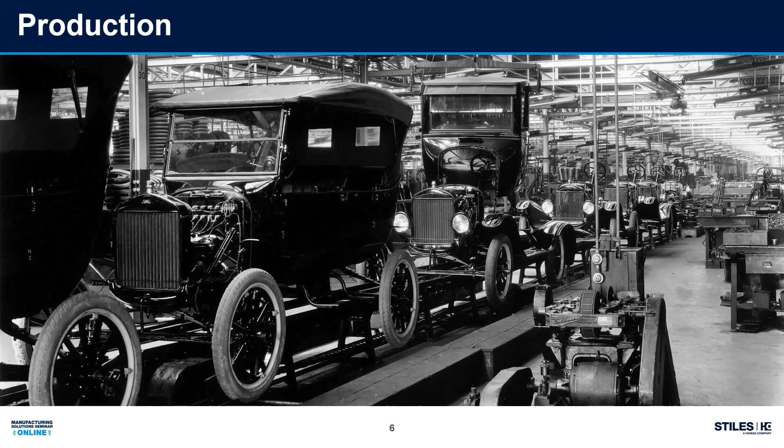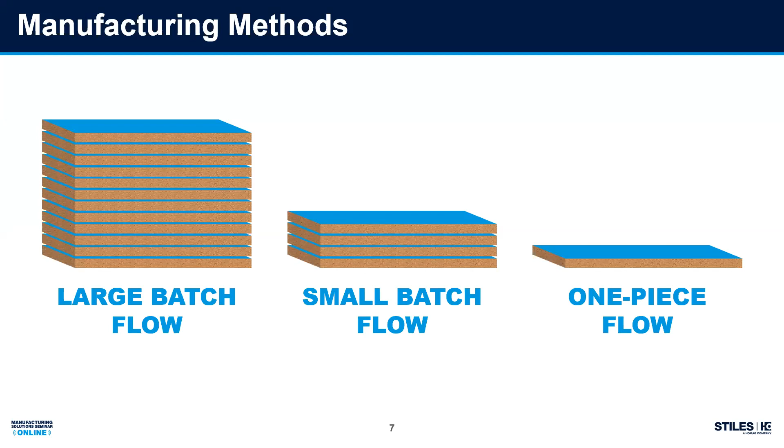We're going to focus today on batch flow. Some of the manufacturing methods that we see in today's world are large batch flow, small batch, and then the buzzword is one-piece flow as well. Where does that fit in today? We only have a limited period of time, which means we're going to take a lot of thoughts and information, and we're just going to be scratching the surface, but hopefully we can challenge you with some ideas.

Large batch flow - we sometimes think more is better, and I'm not one to challenge that, but the demands of our customers limit the amount of a lot of the same part opportunities that we used to have.

This style of production is defined as continuous production of items in a series of steps, where all steps are performed concurrently. What this means is I do all of a part in step 1, then move it to step 2, then move it to step 3.

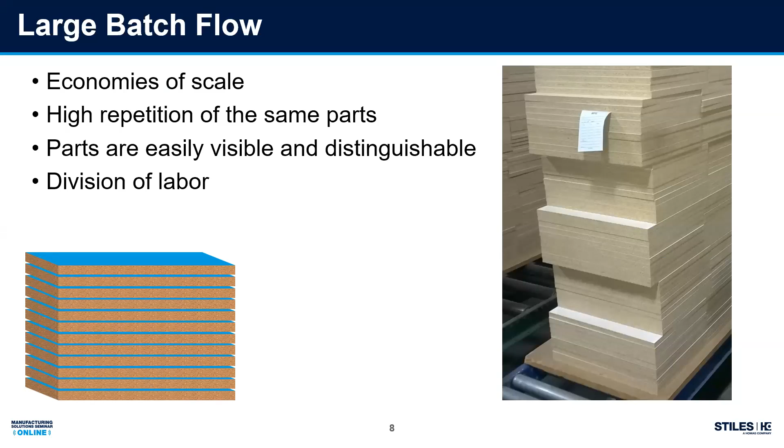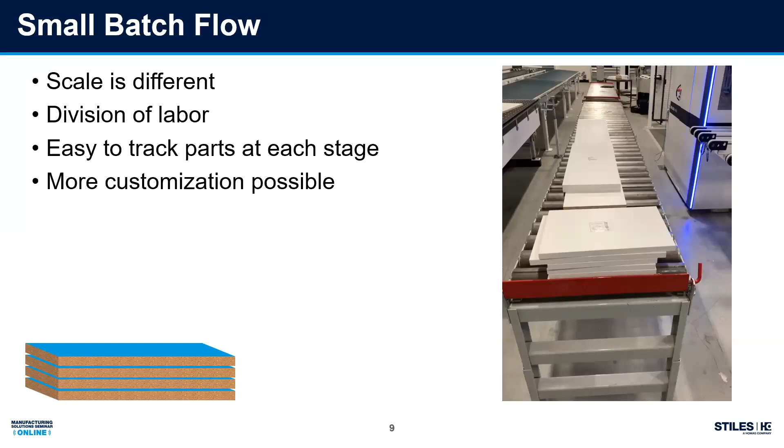Small batch is very similar, but the difference here is instead of a part moving from step to step, I'm moving all the parts for the batch through from step to step. Now this allows for a little bit more customization. It's easy to track the parts. You still have a great division of labor, but the scale is definitely different.

And then one-piece flow is a method of production that moves a product along the stages of manufacturing production, and it moves along those stages once that piece is complete. In other words: I touch it, I move it.

Now, when you think about the mass production in that Henry Ford assembly line, keep that picture in the back of your mind. What Henry Ford had was a great feeder system to that assembly line. We're going to take a look at how that feeder system works in today's production and how we work with it, and let's take a look at how it relates to panel processing in our factories today.

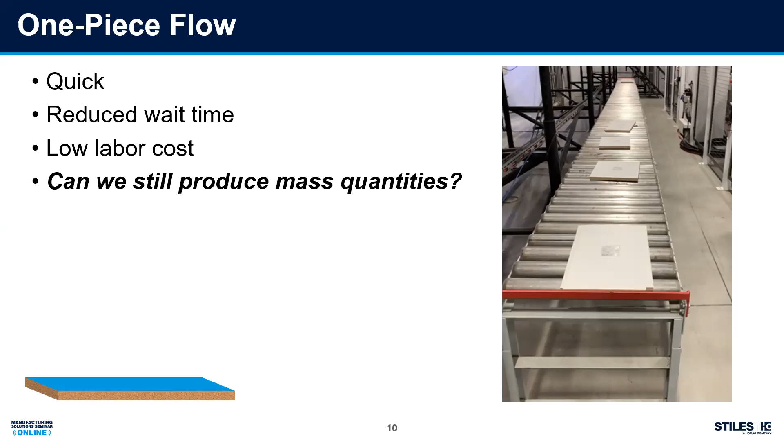So I talked about Alec - well, I'm going to reintroduce him today. Alec is the owner of my shop, and we'll be using him as an example. He has a lot of questions.

So what is the difference between small batch flow and one-piece flow? Should I implement a one-piece flow in my solution? Is there a hybrid solution? What is the best for me? What about my business? When do I make money?

Boy, Alec, those are all great questions. Hopefully by the time we're done with this presentation, we can answer a lot of those for you.

But I'm focusing on small batch flow here. Why would I do that? Doesn't this illustrate that one-piece flow is better? Well, the answer to me is really pretty easy.

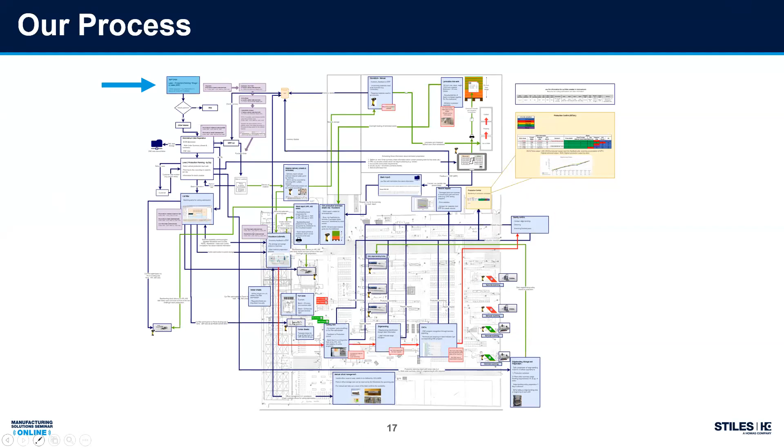But let's get back to the simple aspect. We have customer design and customer order. Now, remember Alec — he's going to help us understand a more modern method of getting an order. Let me get him; I've got to turn off my laser and make sure I don't lose my presentation. Thanks, Scott. All right, go ahead, Alec.

Perfect, good to go.

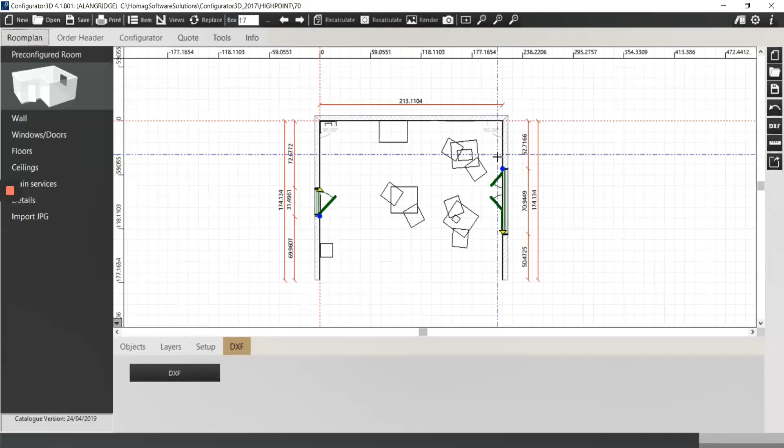Scott started this presentation talking about customization. In today's world, our society is dominated by custom this, custom that, and ordering everything online — from customizing a car, one of my favorites, to designing a pair of shoes. Customers definitely don't order the way they used to in the past. So why not bring that to our industry? Why not have a solution that can configure what we make or sell, from couches to cabinets or even concert stages?

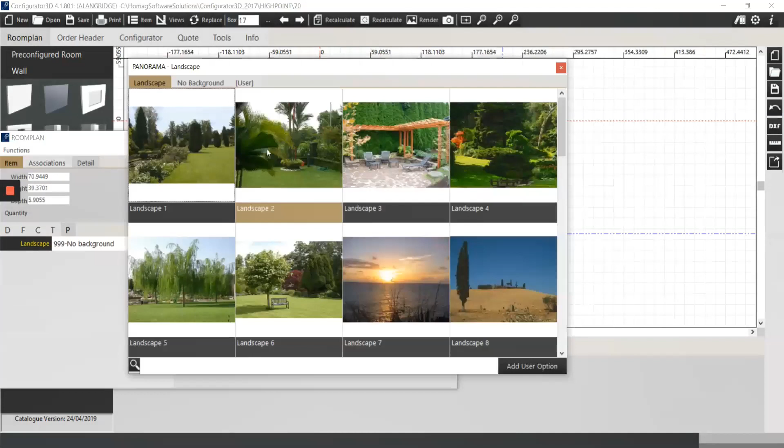What you've been seeing here is the start of creating a typical job inside the Configurator 3D product platform. The Configurator 3D is built off a graphic engine, so if you haven't already noticed, it's much different than most systems used in our industry.

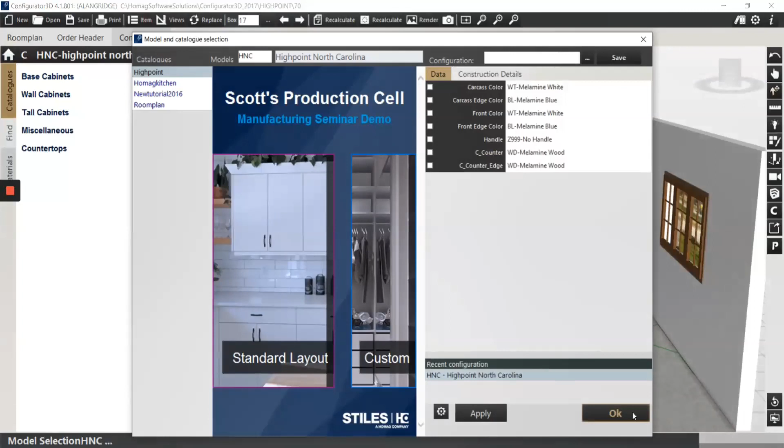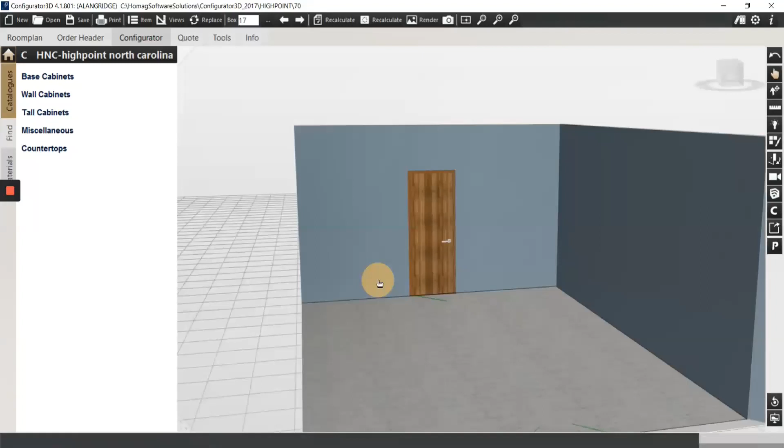Using a configure-to-order solution such as Configurator 3D, you can create rooms by placing pre-existing products or designing with parametrics, essentially making items fit your space. It also lets you modify color selections and quick variations like hardware or door selections. The flexibility and customizability of Configurator 3D allows you to create a design specific to your end user while virtually walking through the job as if it were a mock-up or store display. Here's what the configurator can do.

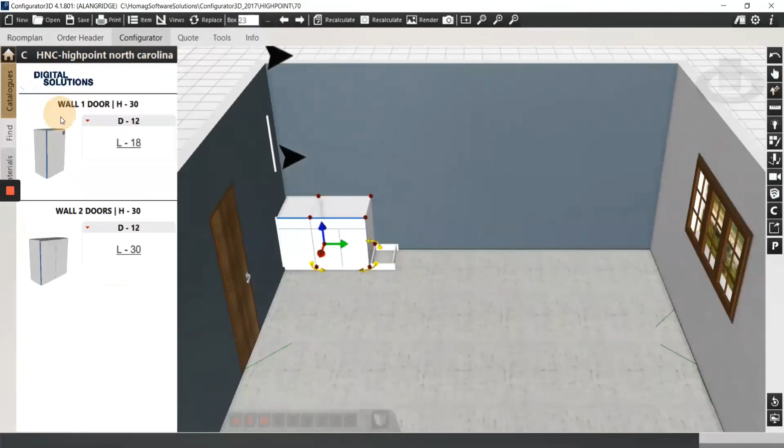Realistic and accurate 3D renderings differentiate you from your competition, helping your close rates increase substantially. A recent study showed 40% higher conversion for close rates and 30% improvement in average sales prices when using 3D models instead of 2D static images.

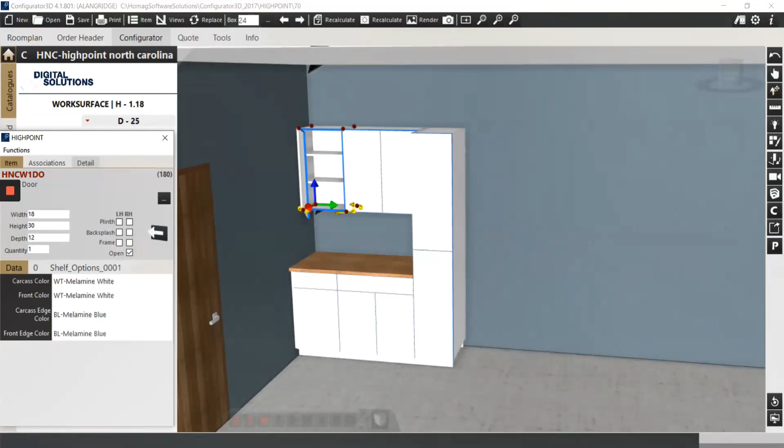We were just showing some of the tools available today to you, but whether you have VR goggles and want fully immersed virtual reality, mixed reality with an actual picture of your design environment, a shareable 3D design link, or anything in between, we can help you.

These tools help you get more business quicker while giving your customer the opportunity to almost touch and smell their dream designs. Now it gives you time to spend more time on what you enjoy most.

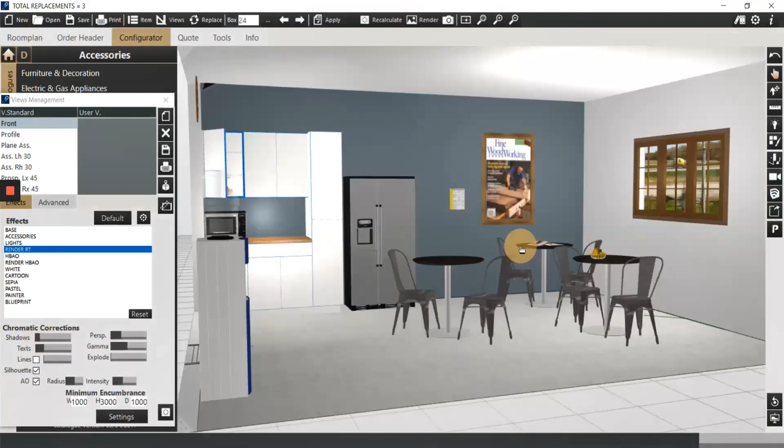Accurate renderings also mean perfect order performance. With the Configurator 3D, you are delivering complete, accurate information about the order, not only for the factory floor, but for the end customer as well. More about that in a few moments.

We pointed out that many people are shopping online today, and with the stay-at-home order due to the coronavirus, a 3D web-based system is even more essential, honestly. This seamless product platform for online web design and sales tools is a solution.

This same platform has solutions for franchise, dealer, or design networks to connect right to that designer. Configurator 3D is a scalable solution to drive your business of today while preparing for your business of the future.

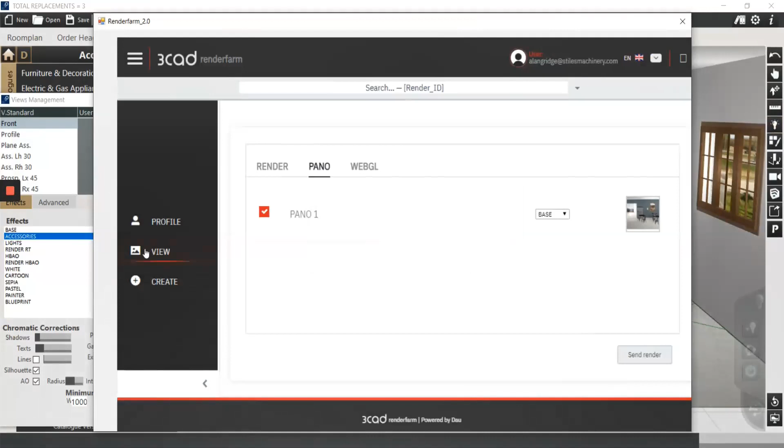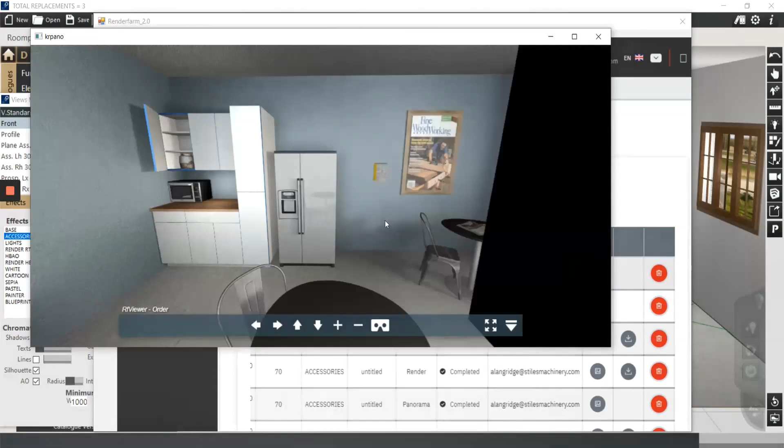Now, while we continue to show the graphical design features and processes, we'll now get into the manufacturing data. In the background, we have a full back-end solution with all the machining and necessary information for your factory floor. This gives you opportunity for custom printouts for both external and internal use, as well as live price lists and quotations as designs change.

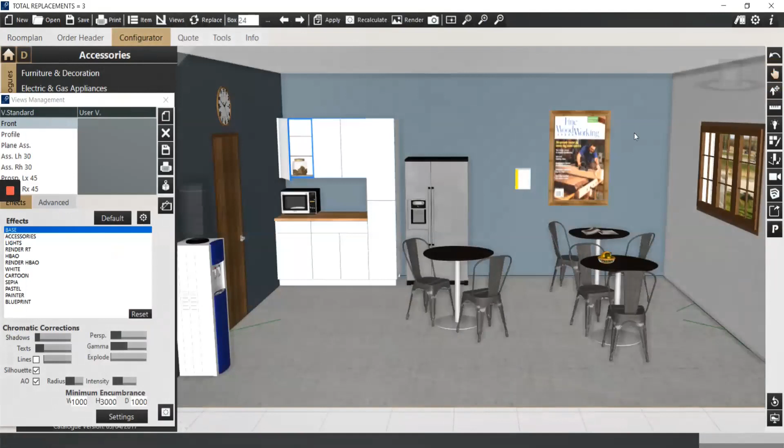You can easily look through the pricing structure and bill of materials, as well as remake part information on the shop floor, being that it's one of the harder things to do in today's shops. The configurator makes this easy for those times that your edge bander guy accidentally drops a panel and it gets damaged. Now, Scott, are we making any money yet?

Well, Alec, thank you. I think we're getting close, but what about the machining information? Is it brand specific? No, and I love that question. So the Configurator 3D is completely an agnostic solution.

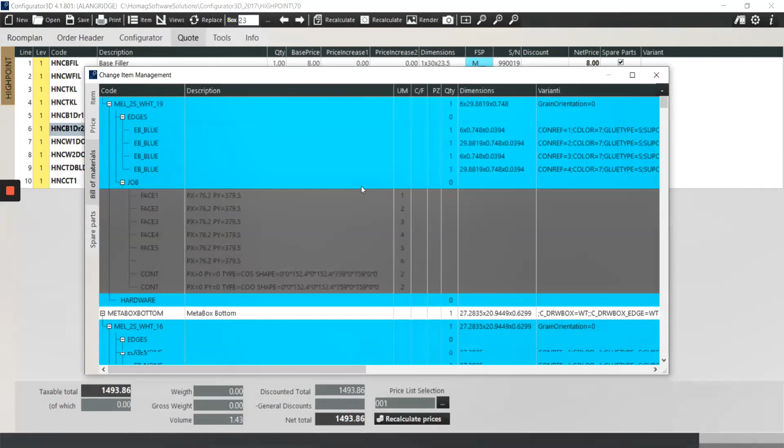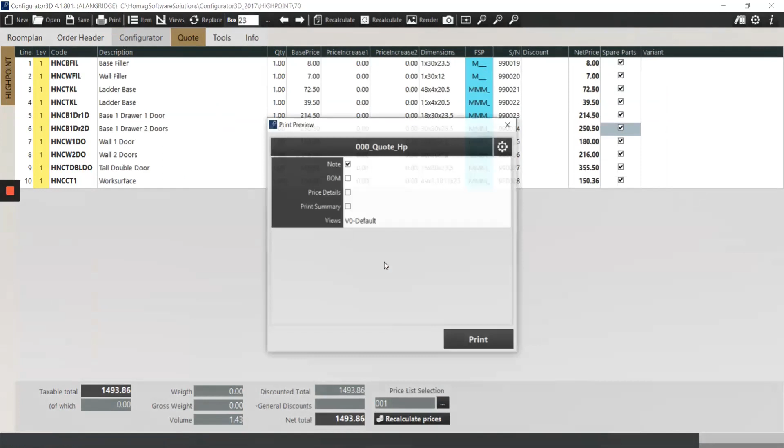So we can connect to any machine as long as it has data feedback on it. What about additional softwares like ERP and CRMs and MES systems, working with those? So being a flexible product-oriented software, we welcome those connections to other software. We want to ensure a total solution for you as the end customer.

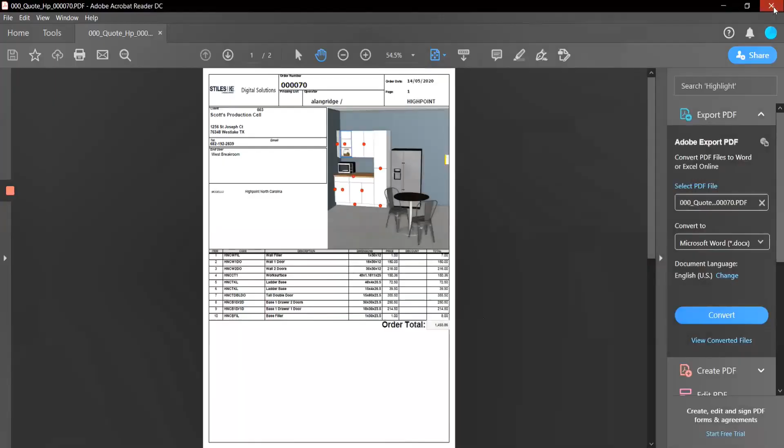So Alec, I've got this 3D visual, this 3D graphic. What do I do with it? So I'm actually going to send a 3D link that anybody here can click into, and you're going to feel yourself being immersed into this situation.

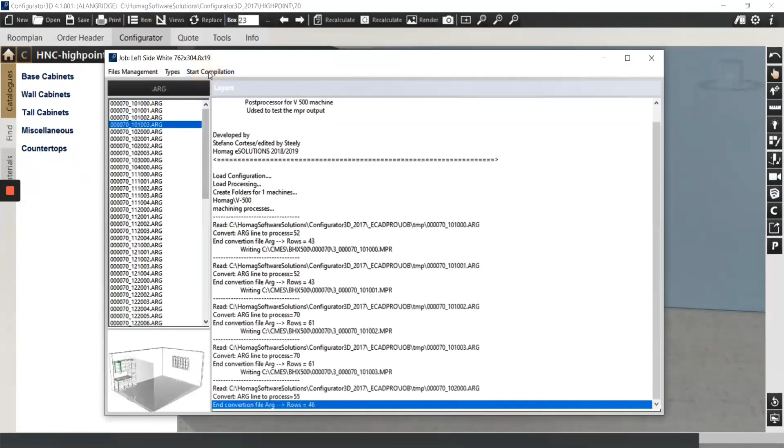Now, from what Scott said, he's asking me why. Well, honestly, I've had enough of people saying, this is not what I ordered, I did a different color, a different layout, and this is something I can give them and say, hey, this is exactly what you're getting.

And I usually give this right with the confirmation order, saying, yes, this is the product I want, this is the kitchen or the area that I want, and we're good to go, we're all on the same page. Alec, I really appreciate it. That's again a much more modern method of getting the information from the customer design to the customer order and making sure we get all that together. Alec, again, thank you for that.

Absolutely. So as I mentioned, we've simplified the process. Now we have to go from that customer order to our data and materials and into our production, our supply chain. And the supply chain is what our factory is, and we'll talk more about that.

So remember, we're going to take this elevation, and we're now going to have to create this elevation into our system. What do we need for that, and how do we get all that information in? So we now are working with our ControllerMES.

So our Configurator 3D product has sent data, the pictures, the parts, and all that information to the MES. Controller MES then is going to take that data, double check and make sure we have all the data we need.

It's going to look at the parts and make sure all the edge banding information is there. It's going to give us the barcodes that we need to produce. It's going to make sure the edge bander data generation for the automated edge bander is available, and make sure all the CNC machines have the right data at the time we need it.

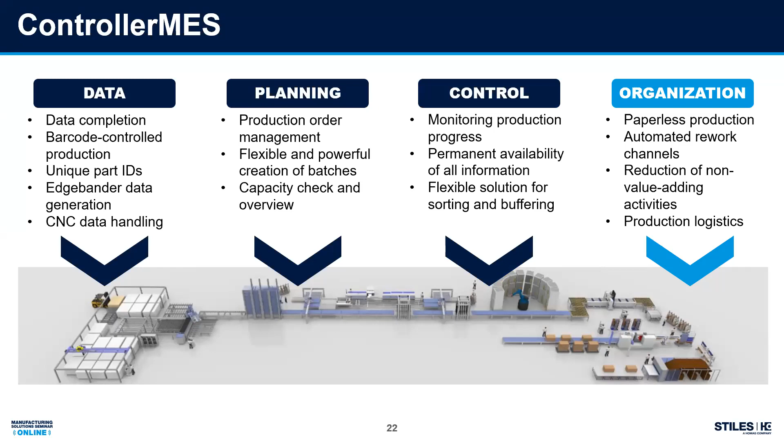Man, it does a lot for me. Now, you guys do that on a daily basis. Do you have an MES system? No, but an MES system can handle this faster, easier, better.

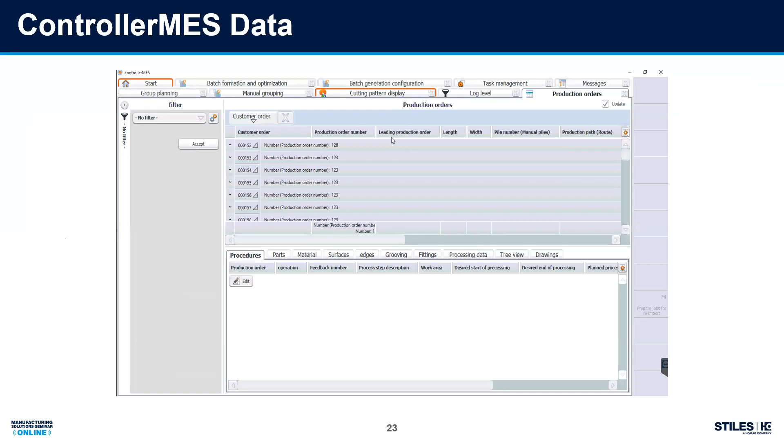This screen is just an example of some of the batches that we get in the MES. So the configurator's created a job, we've created a batch now, and I can take that batch and drop it into a day, and it'll automatically create a production day based upon the delivery schedule, or I can drop my batches in based upon any other type of criteria. In this case, it was delivery days.

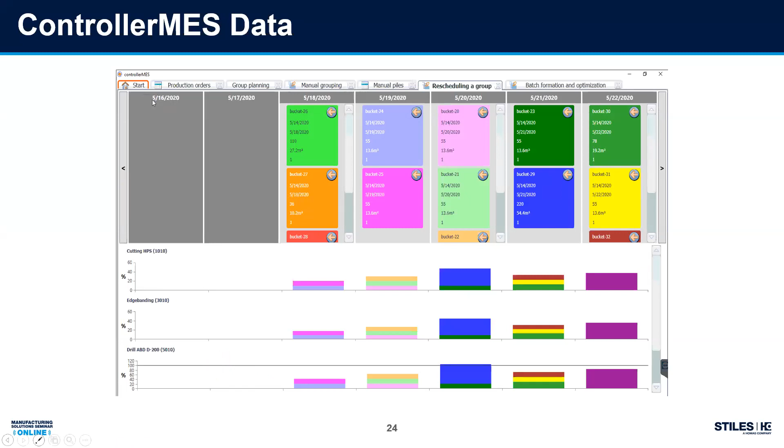Now, how do I understand what a machine can do on a daily basis? Is there automatic feedback? Is it taking artificial intelligence? Is it doing a lot of other stuff?

What we've actually used is our machine monitoring reporting system in the background. Each machine produces a lot of data, and each factory uses equipment in different ways. This is not to say they're using a drill as a router, but that the operator, mix of parts, tooling that you use, and handling in each company puts a different load and therefore output on a machine.

As you heard from Tamika, in my previous life I was a saw expert. And I could tell you within seconds how long it would take to cut a sheet or stack of sheets. I could project the output on a daily basis. But you never believe it. Often my projections were not realistic.

All of those other items, the handling, the operators and things like that, which we have little control over, dictated the output. And many times I would be able to go back and work with my customers to help improve the output. But now with MMR, you have the data where you can see these things for yourself. You can understand on a historical basis what is a realistic number of parts you can achieve and set those limits now in your MES system so you can plan realistically what your factory will do.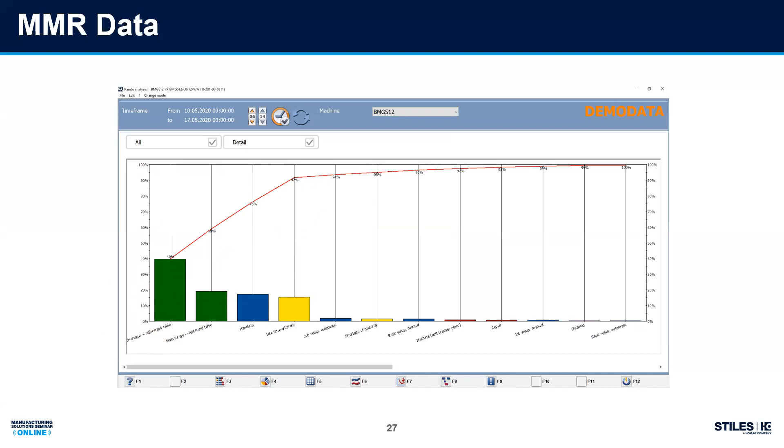Now we've got our data from the office, and with that data, we know how much material we need and things like that. So now we need to get to production. And this is the point where it's usually a lot more fun making this presentation, because you can see all these cool machines in operation, and you can see the part flow and see the operations actually happening.

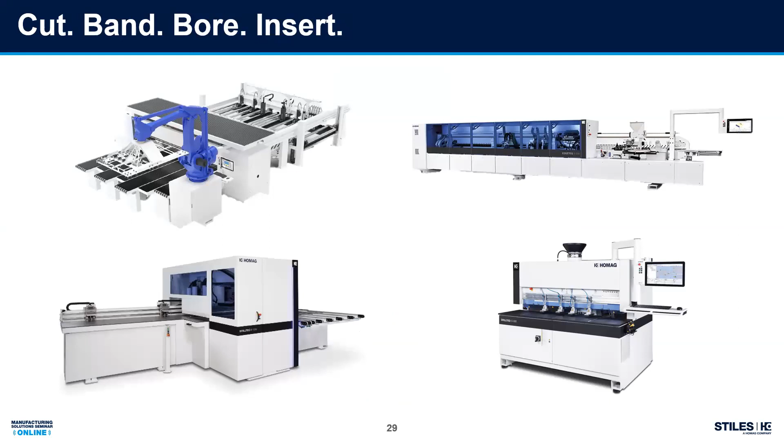I have to do it on a screen. So our operations are cut, band, and bore.

Well, the first thing we did, when we looked at the layout and the type of machinery we're going to balance in there, is we used the Goal book. It's been around for about 25 years, and its main focus is on the theory of constraints. And the theory of constraints basically states that you have to work to your bottleneck. So we were able to use those theories to figure out the balance and the load between each machine.

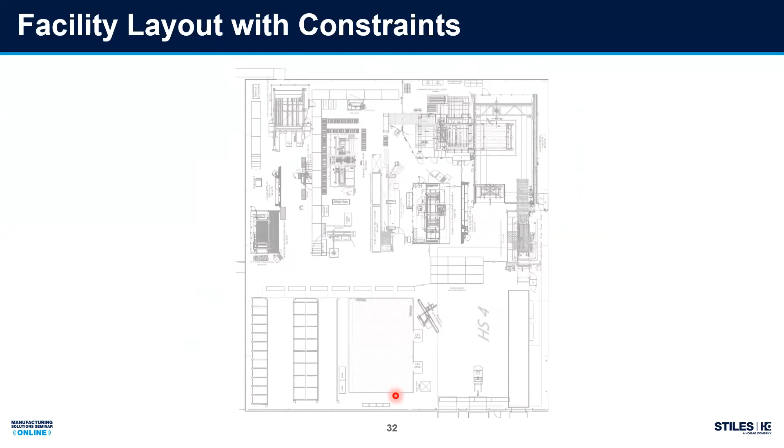Now, this is the space in our showroom, where our factory is laid out. You can see, if I remember right, it's about 30,000 or more square feet. But I have problems there. I've got a lot of it taken up by storage and classrooms. I've got shipping and receiving. I've got walls in place. I've got columns I have to work around, and I have material flow areas that I can't block off to be able to get through.

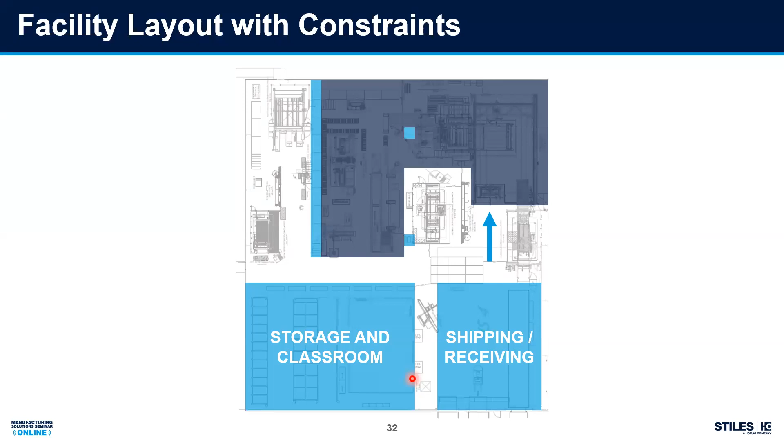So these are some of the ideas of facilities dictated by shape, space, and machine design. That's some of the ideas of how we got to the layout that we're at to be able to work with it. And that's actually what we're going to be looking at, is that space right there.

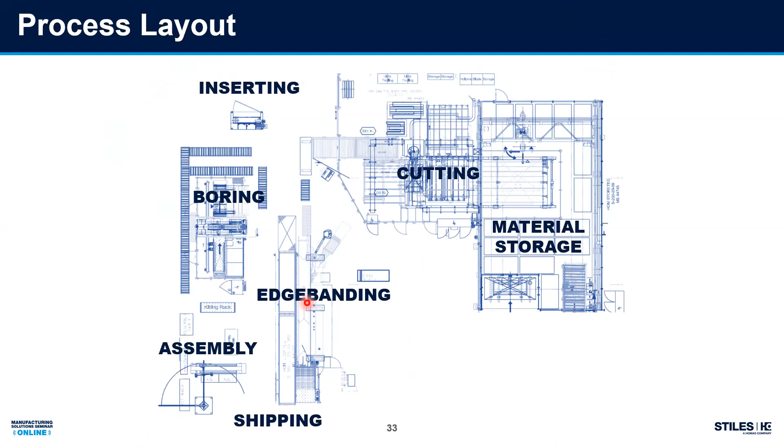In that space, we've got our material storage, our cutting, edge banding, boring, inserting, assembly, shipping, and this area here could be utilized for product storage and things like that. And if I look from one side to the other and from here to here, it's roughly 80 by 100 in space. So when you think about the amount of space that we have, it's roughly 10,000, less than 10,000 square feet to be able to produce what this system is planned for. And this system is planned for about 160 cabinets or cases a day based upon the designs that we looked at.

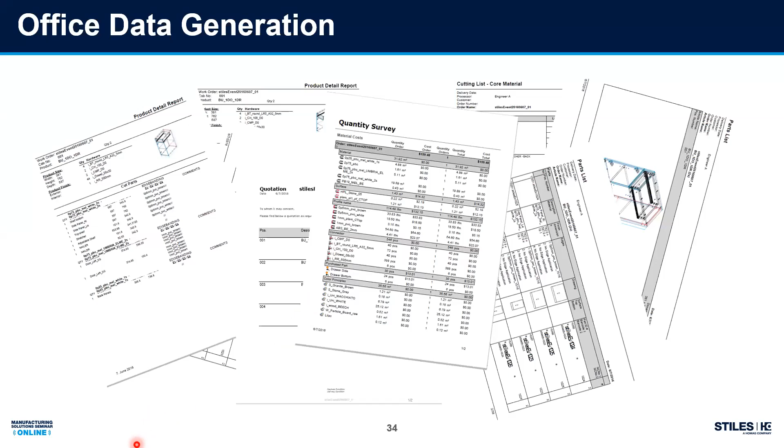Now, how many of you, when you start to introduce a job into the factory floor, have to produce a bunch of reports, paperwork, bill of materials, optimization patterns for the saw operator or for the nested-based machine operator, things like that, before you can even send the job down to the floor?

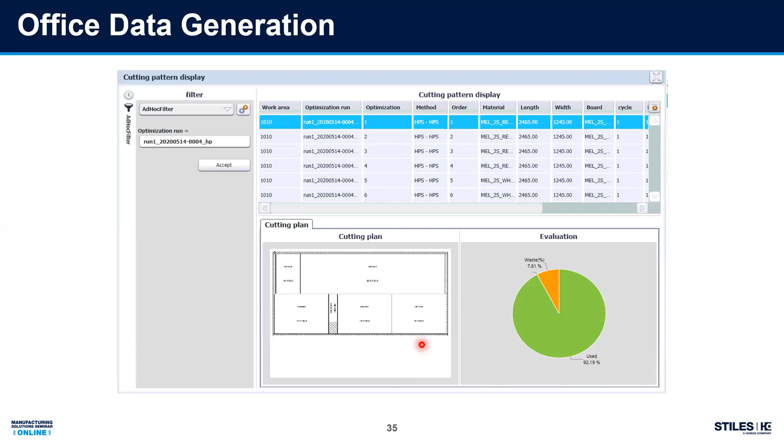Let's go to production. So by working with our Cut Rite system and the MES balancing that, it's automated that. Now, if it didn't meet a certain limit of our yield, it could kick it back to me, and I could then affect my batches by maybe combining two jobs together, mixing a couple of different parts into it, things like that, to help drive my yield to get to the yield that I need.

And now you can see the storage system, a robot, 3-axis robot, is going back, and it's feeding and bringing in material. And guess what it's doing? It's feeding another robot. And if you look carefully on the screen, you can see that the next sheet of material that is getting ready to set down right now is a completely different sheet.

It's a different color of material. Our constraint of changeovers, batch size and things like that is no longer the limiting factor. Many companies make decisions on material handling for batch sizes, for how much they want to produce, and for changeovers. In our system, we don't have any limits that way.

Now, what are some of the ROIs for using a storage system like this, the SawTeQ? You minimize the damage of material. One customer told me 300% less handling of the material. It also gives effective methods of offload and inventory control. You know what it is, where it's at, when it was brought in, and how to handle it.

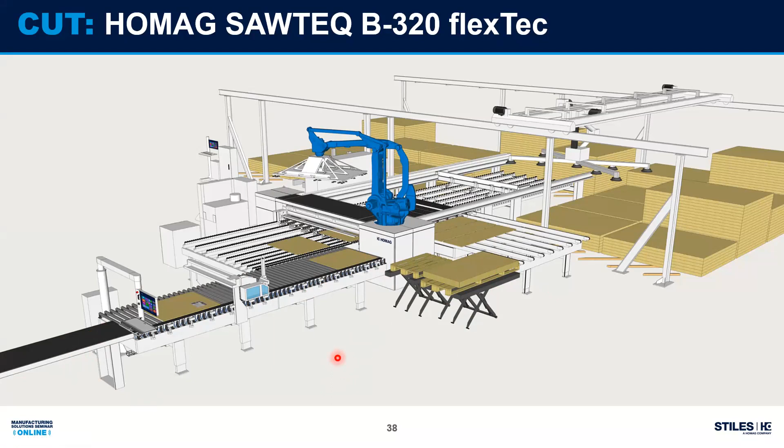What's really interesting about this is it allows me to run the system before my shift, during lunches, at break times, without anybody at the machine. It automatically stacks to those lift positions, creating a chaotic stack, setting some parts aside, laying them down and interweaving them. So I now have a stack I can move to another area without worrying about them falling over. Many robotic systems only stack with center-to-center justification.

So if I was doing different size parts such as this pallet, there's no way I could move it afterward. We also talked about label printing. The letters here represent the path these parts are going to take. You can see I now have all the information I need on it, and this barcode ties this label, this part information, this piece, to all the other data that we have. That's a critical part.

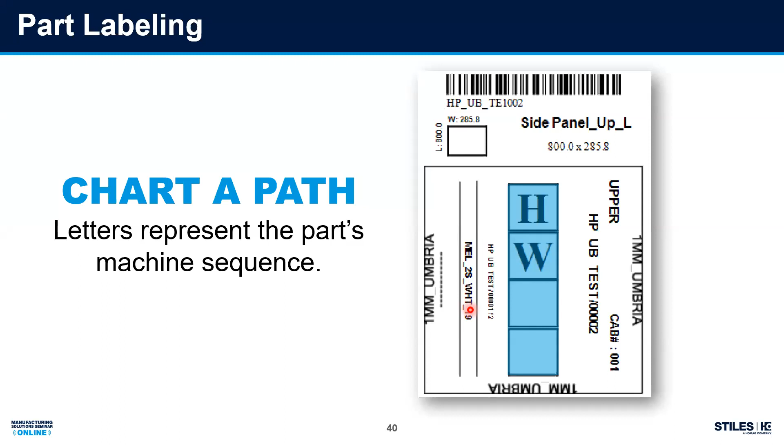Not only that, by automatically applying the labels, we get the exact orientation. So I know the grain direction. Even if it was a cross-grained part, it's not going to be put on the next machines incorrectly.

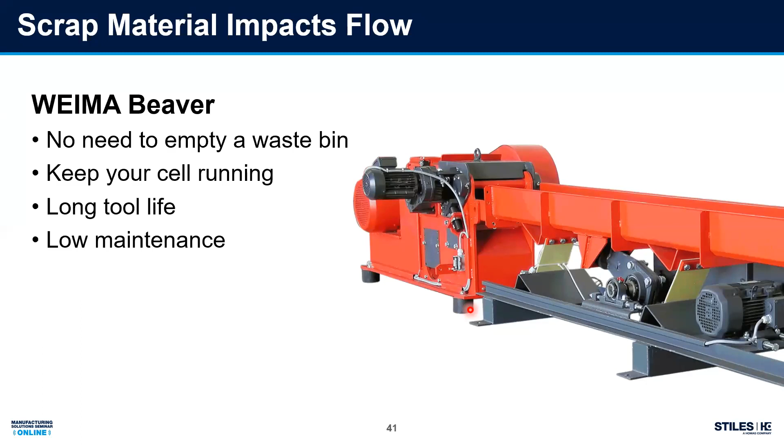Now, what you can't see in this is waste removal. That saw is cutting pieces, dropping things down. Instead of having to stop that machine occasionally, or stop any of the other machines, I have a grinder which automatically empties that saw, grinds the pieces up, and puts it in my dust collector. Some of these options we talk about aren't inexpensive, but the payback from reduced handling and keeping the parts running through makes it well worth the cost and the application.

Now, this is the view outside the front of the machines. We're taking a batch, and now we're breaking it down. Remember, we talked about the sheet sizes and having a batch to get started with? You can see we've transitioned from a yellow sheet to a white sheet.

You'll notice in front of the edge bander, there's not a big stack of material there, right? As the part is finished, you can see Gil, one of our operators, taking the part away. As that part is finished, remember that one-piece flow, it's moved along, handled once, and it moves through the system.

Now, this also requires flexibility, remember we talked about that. John Ridgway, in an earlier presentation today, showed a video of an edge bander running, and again it was exciting - it was like watching paint dry because you don't see what's happening. Same thing with this edge bander, right? It's doing multiple changeovers.

It is doing unique contour trim routes, trims on the side. It's doing straight trims sometimes, and it's doing all that stuff without anybody opening a hood or any other changes.

As you can see back here, this is 6 different coils of tape. I've seen blue through this system already, I've got white, I've got yellow in there, and nothing's been changing. The screen gives visualization so we know the right orientation of the part. You can see I've got yellow in there now and white in the edge bander right now at the same time, showing the flexibility of the system and the changeover.

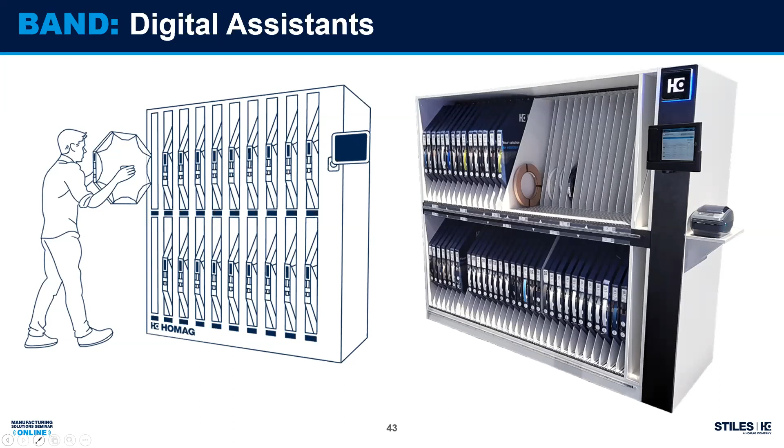And I mentioned that light stack, or the scanner stack above the edge bander. It could be run with a hand scanner like this, but just imagine trying to feed parts into an edge bander and picking up that hand scanner every time. Again, an automatic scanner is not inexpensive, but boy, does it really help you move parts through in a flexible system and keeping your part count up.

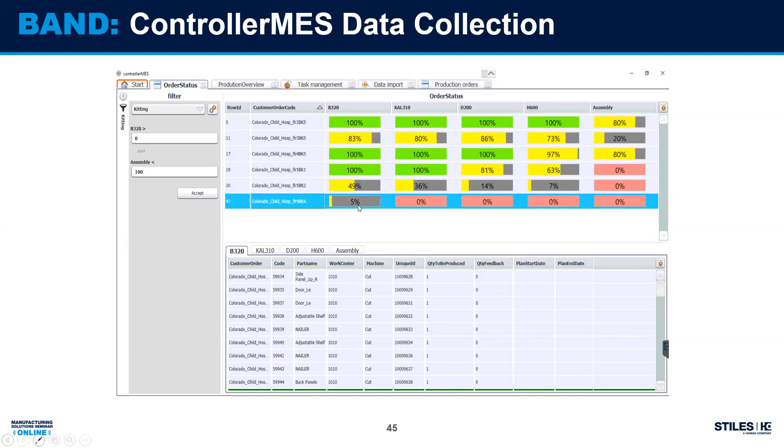I talked about MES and some of the information it provides for me. It's pretty exciting here that I can see exactly what jobs where in my manufacturing operation, how far along it is in the production sequence and things like that through the reports and the dashboards that I have available to me. And these dashboards can be put up in multiple places at different machines at different stations, and they can be tailored to that station if needed.

Now, we talked about that capacity and that matching machines. This is not one of the machines in my, well, this is a machine in my cell, but it has a couple extra options on it. This is a comb feeder and stacker on this one. This is the outfeed section, and you can see there's different size parts in there. So this is from my DRILLTEQ H-600, one of the machines in my system.

And it has very fast changeover. It can change from one part size to another one on the fly. And then, unfortunately, I didn't have a good section of video, but this one here really shows that capability. So really what that machine looks like in my cell is this right here.

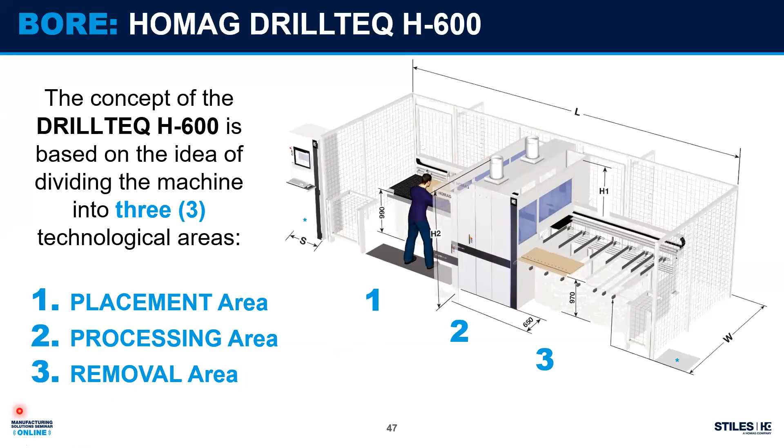So I have a person that scans the barcode, feeds it in, okay, so that's the placement area. It processes in here, and the processing is 2 parts at one time if that's available to us, or 1 part at a time, or 1 part with both sides, things like that. And then I have my removal area. Again, the flexibility and the pace of this machine allows me to keep up with the productivity that I'm looking for on a daily basis.

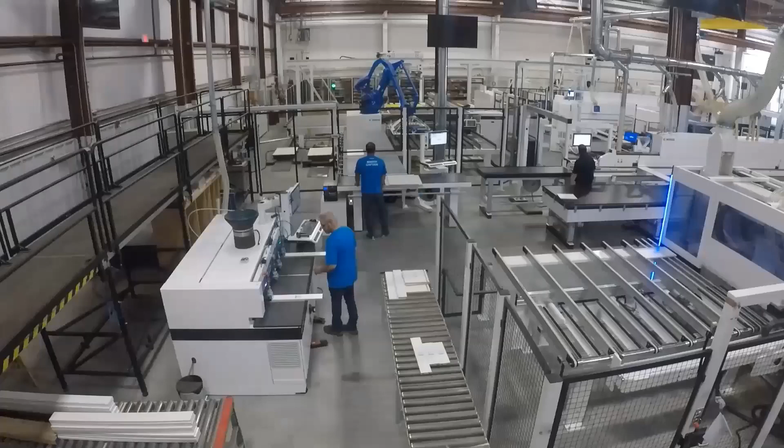The last machine we have in our lineup is our DRILLTEQ D200, our dowel and inserting machine. You can see I've got this robot back here, a robot up here, this big edge bander and this big drilling machine. And then I get to this one right here.

Guess what? This machine here does the most work of any of those machines. If you think about it, a cabinet needs about 11 parts, so I need to cut 11 pieces per cabinet. On my edge bander, I might edge band 18 edges in a cabinet. On my drilling machine, I might drill 4 of the parts for that cabinet. But a lot more pieces get dowels in them.

In fact, I need anywhere from 24 to 36 dowels on a standard base cabinet or wall cabinet, depending upon what it is. And what you just saw was Gil feeding one part, scanning the next part, a very fast changeover. When he was done with the part, he stacked it. There's a little batch there just because of the pace of the machines, the equipment placement, and handling, but you can see the efficiency of the system.

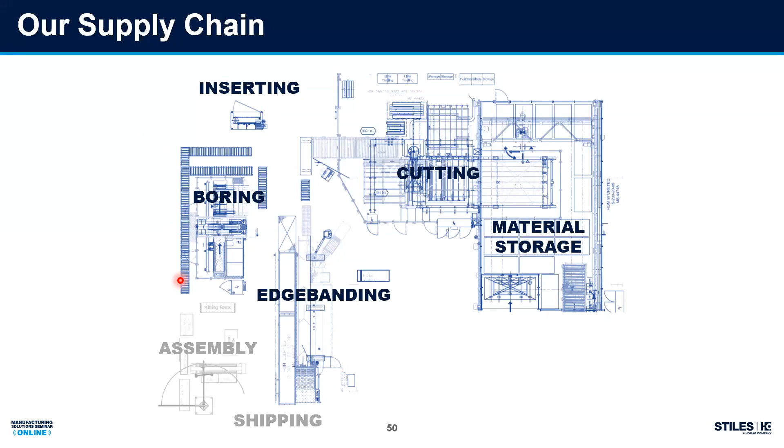So now our supply chain is just about complete, right? We've had our material, we've cut it, we've edge banded it, we've drilled it, we've inserted it. The parts are now flowing down this area. But have we made any money yet? At this point, I would say we have not. So we've done the customer design, order, and material data, and now we get to assembly.

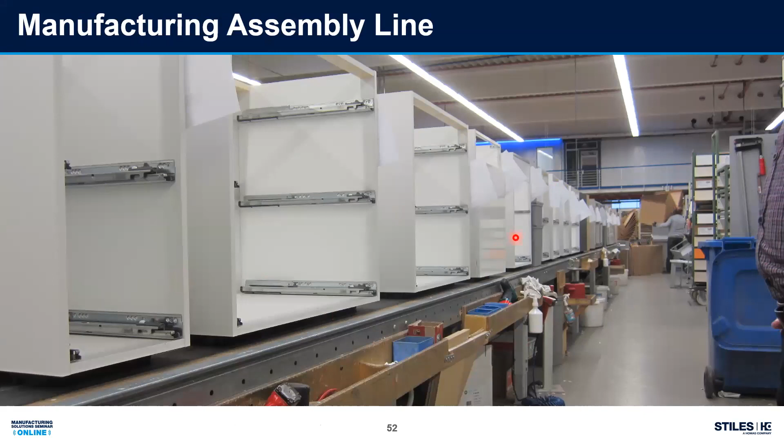When we think about assembly, isn't this exciting? This is what we all want to have, a lot of cabinets going down an assembly belt with everything being done to it. But at the pace we're producing, this is the Stiles assembly area. It was designed for the space we had, the constraints, and the number of cabinets I need to build today.

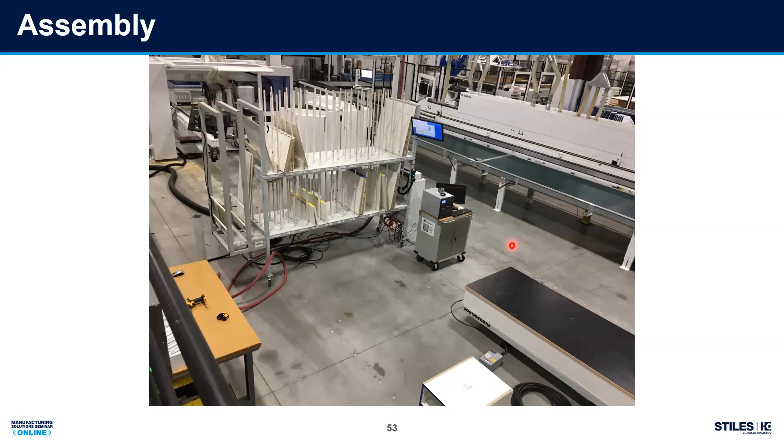In the Stiles assembly area, I have my parts coming down. The first thing I have to do is prepare them, consolidate them, and sort them. My MES system, as I scan that label, tells me where those parts need to be consolidated so I can put together the parts to build a product. In this case, we're building cases, but it could be any style of product where I need a series of parts put together.

The screen up here is telling me where to put the piece. He's just scanned it, and the red one shows where it's going to go. I actually have LED lights here that light up and highlight which slot I need to put the part in. When that part is ready to build, it turns green, and if it's green, it's okay to pull those parts and build it.

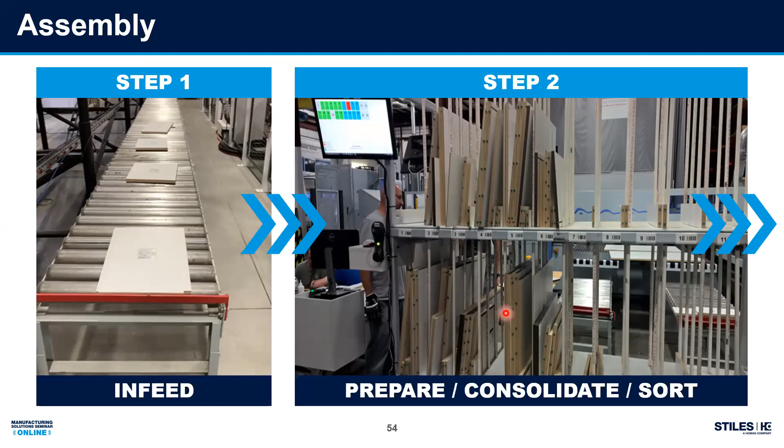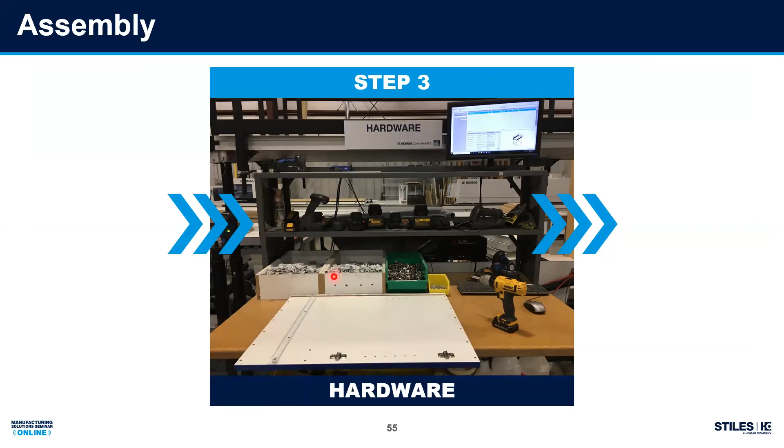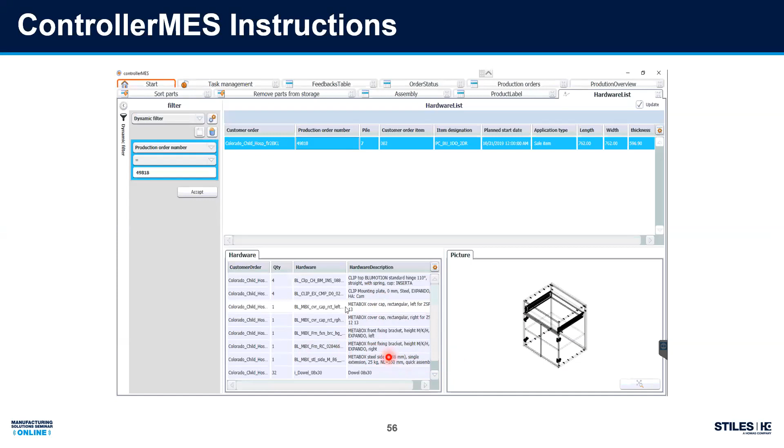When I pull those parts, I take it to my hardware table. Now I have all my hardware, my hinge plates, my hinges, and all the tools I need to hardware that piece before I put it on my assembly table. This screen up here gives me the information on what hardware I need, telling me what type of metabox, clip, or drawer slide I need. I can even put a rack in front of that and light it up, so I pull the right drawer slide, left or right, in the order I need. I can do a lot with my MES system to help improve the throughput of my system.

Now we're using dowels for assembly. Again, there's my hardware table, and here's my assembly table. You can see how few steps there are in between. So I have one guy who's kitting, hardwaring, and pre-staging for my assembly, and we're using dowels to put these together with.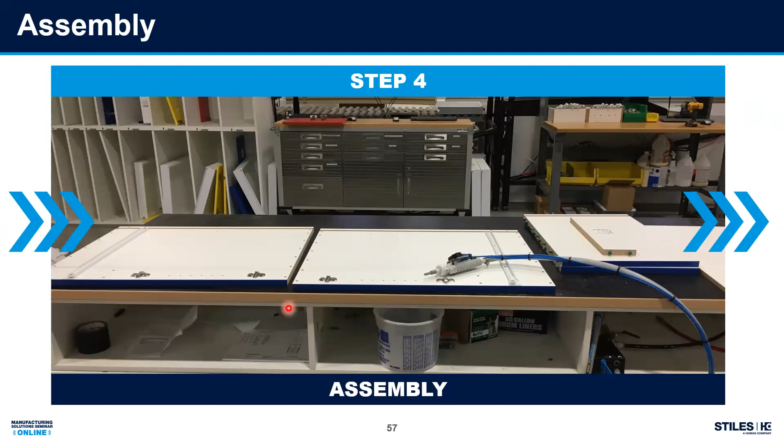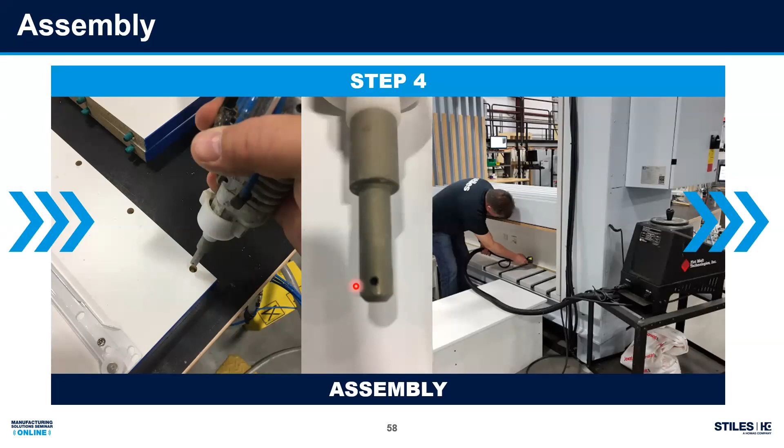In doweling, we have a glue pot applying the glue. I'm using pre-glued dowels for my D200, and you can see the nozzle isn't like my normal ketchup bottle, but it makes sure I coat the sides of that hole, because that's really what's important. I don't want a bunch of glue in the end, I want to coat the sides of that hole. And then we actually lock our backs in place with a hot melt system.

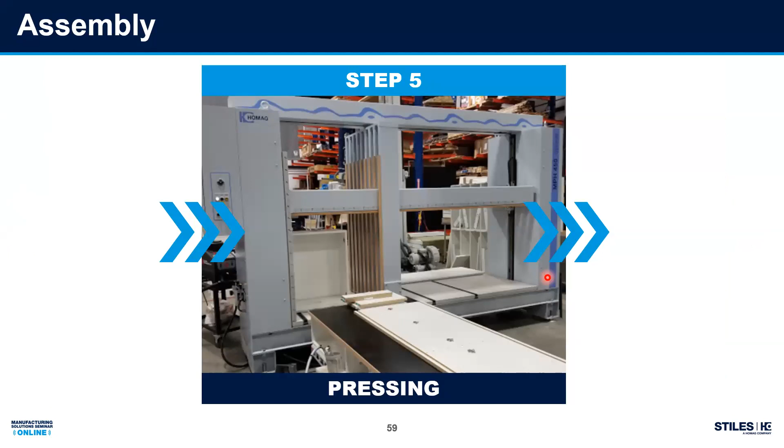So then after I assemble the cabinet, I press it to make sure it's square, to make sure it's tight, to make sure all those joints are in good shape. And then I take it out and I need to put my doors and drawers on it.

Remember I talked about not pulling a cabinet until it was ready to go? One of my pet peeves is walking through a shop and seeing cabinets that are assembled but not done yet, no hardware, just sitting there. There's no doors, there's no drawers. And it's because we assembled them before that stuff was ready, which means I'm going to have to handle it again - extra handling, waste, space, all those things.

My other rack won't tell me to assemble it until this rack has the doors and drawers and door and drawer fronts in it, ready to go. So I have my same kitting system here, and it's tied back into my other one. This also is telling me the information I need to handle that.

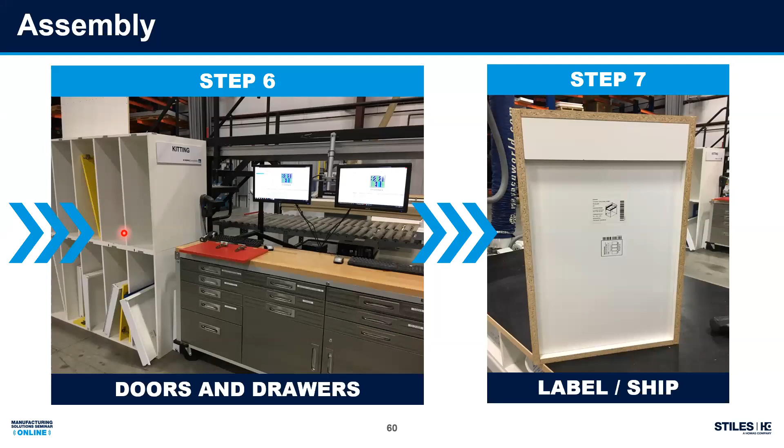So now we've taken care of our assembly, and we're ready for shipping. Now we can make money.

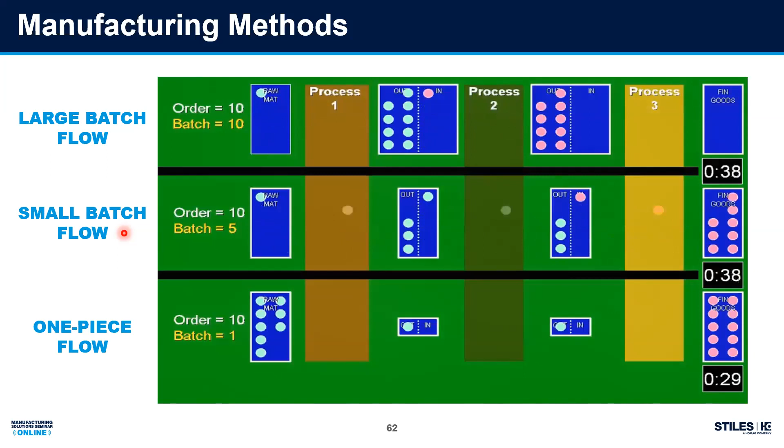Hopefully I've demonstrated that a mix between our one-piece flow and our batch flow can work together to help improve our productivity and our throughput. And remember, our example today was based on 160 cabinets a day. I have customers utilizing this system on as few as 40 and 50 cabinets a day, and as high as 1,200, 1,500 cabinets per day, per shift per day in small batch production and one-piece flow style cells.

What are some of the other reasons and cases for this batch size? Well, space and facility - I mentioned we're doing this in about 8,500 square feet. I've had a customer that was working in 100,000 square feet with large batches, and he was able to go to multiple small work cells and reduce the space in half.

Another customer took out 600 feet of lineal conveyor that he was using in his batch production for work in process, transfer carts, things like that, and took out 30% of his floor space. Floor space is dollars. Work in process.

How many times, if you look out on your floors today, do you see parts sitting there? And if they're sitting there, are they making you money? We improved your cash flow because from the time we start production to the time you can deliver to your customer is reduced, which means you have less cash tied up, ready to go.

When I say less skilled labor, it's because we're delivering the data we need at each station, just like at the hardware assembly, we showed them what the hardware was. They don't have to have that tribal knowledge. We put those parts together utilizing a light and an information system so the end user doesn't have to have that skill set to understand what those pieces belong to, and he doesn't have to have a tape measure. Those are the types of items when I talk about less skill required - not that they don't have to be good at putting things together and have good skill sets to handle drills and run machinery.

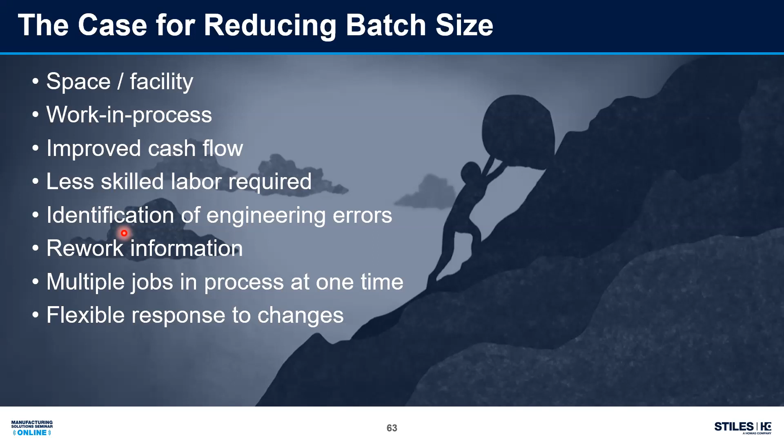So again, as I said, today we've talked about a lot of different things that we could spend days, weeks, college education courses on. And I hope that you can take away a few of the parts on this.